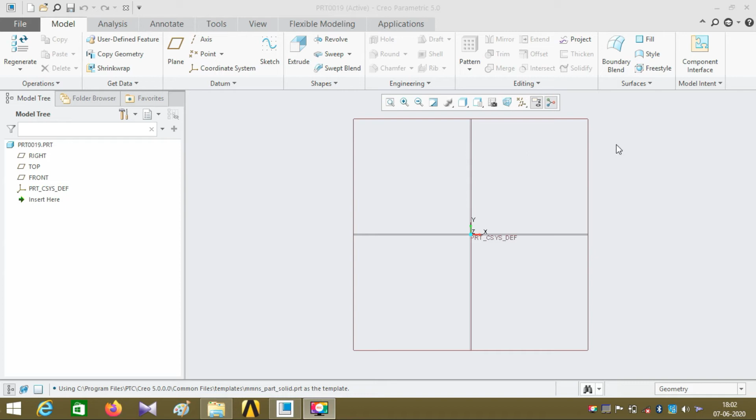And zooming options, etc. Just tilt the middle mouse button, and you may see that there are three planes available which are mutually perpendicular to each other.

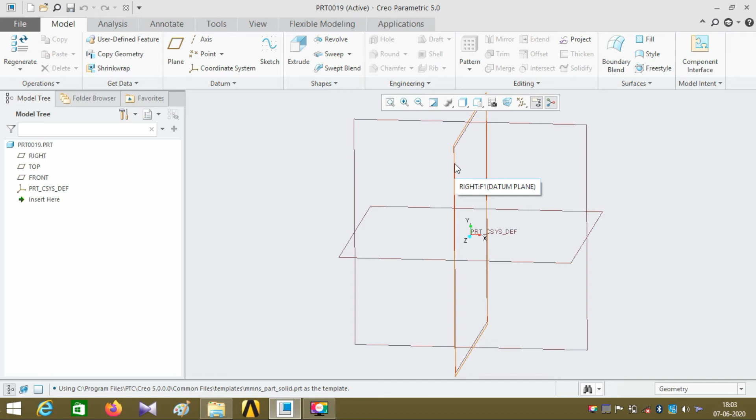This right here is called the front plane, this is called the top plane, and this is the right plane. Coming to the left side of the screen, you may see that there are three planes displayed: front plane, top plane, and right plane.

At the middle of the plane, you may see the coordinate system, which consists of three axes, namely x, y, z. It is also displayed in the model tree. Below is the status bar, and it displays the unit which we are using.

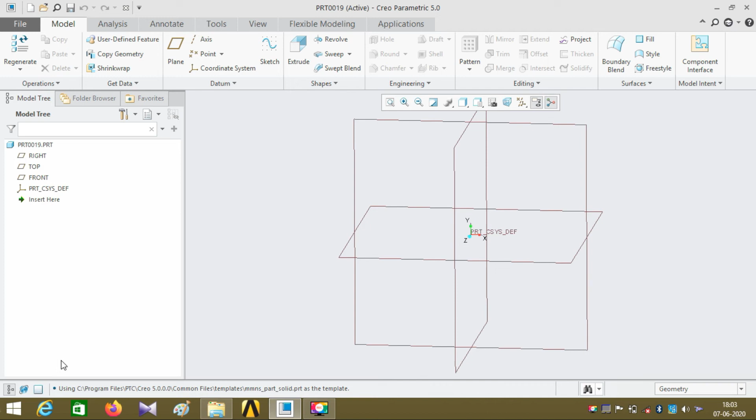To draw a new sketch, click on the sketch command, select any one of the planes, and click on sketch. It is still in 3D interface. To convert into a 2D sketch view, click on the sketch view button.

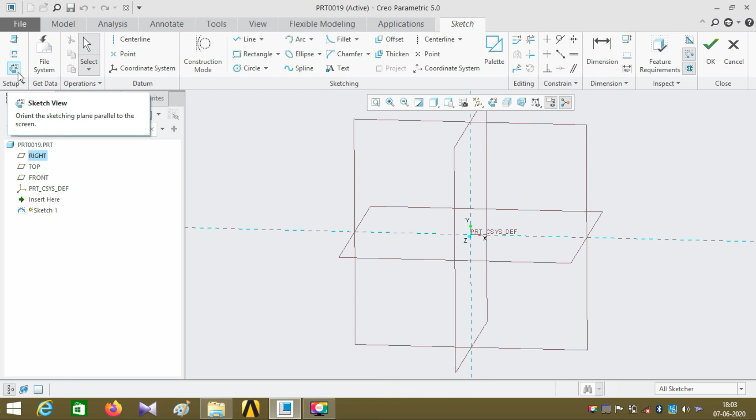And the setup panel, or you can use sketch view in the graphics toolbar itself. It is also available in the graphics toolbar.

So I just explained the other ways of creating the sketch. Right now I'll just cancel it. To cancel, click on the cancel button and click on yes.

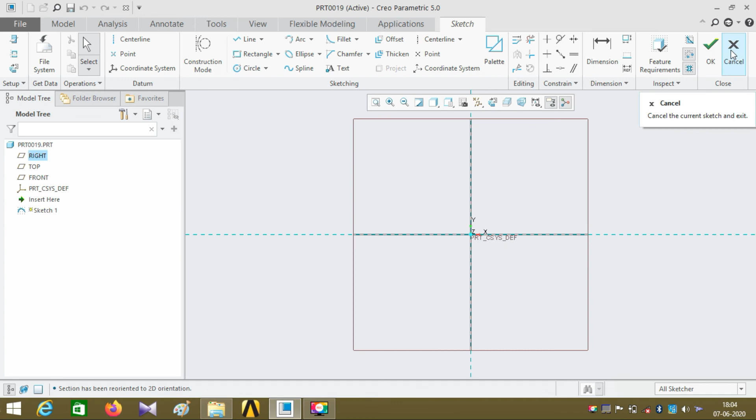The other way of creating is to select any one of the planes from the graphics area and click on sketch, or there is an option in the model tree: click on any plane and click on sketch.

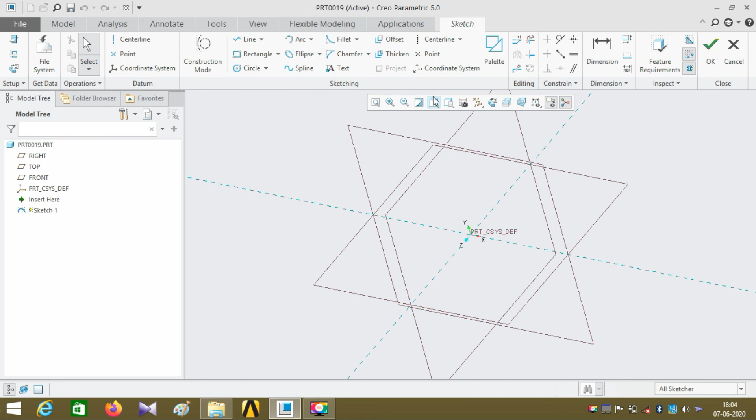So this is the 2D sketching interface. Thank you for watching.